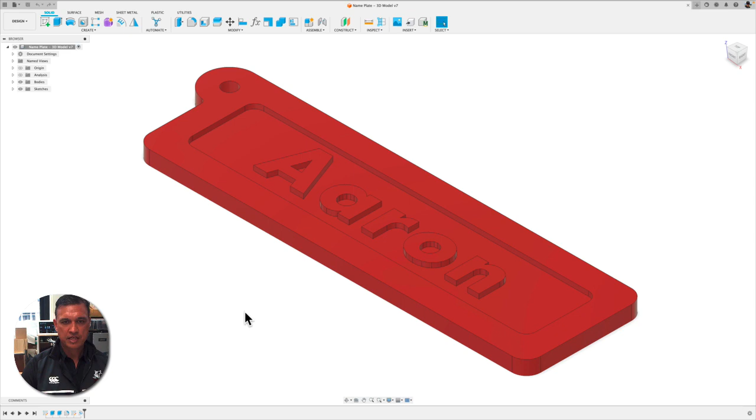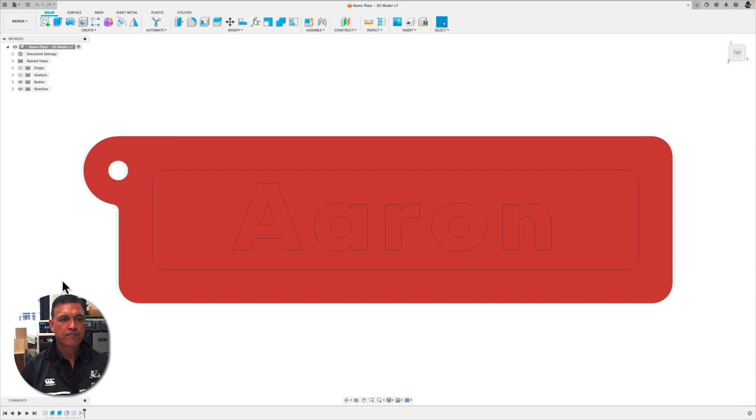Here is the model, the end result of what we're going to make in this tutorial. You can see we have some text in the center. Going to the top view, we have a small hole here for a ring so that this could be attached to an item, and it's essentially made up of a rectangle, a few rectangles, and a couple of circles. So let's look at how to create this.

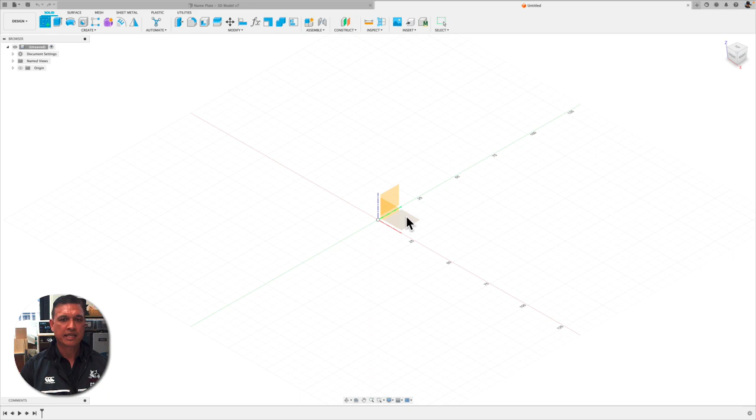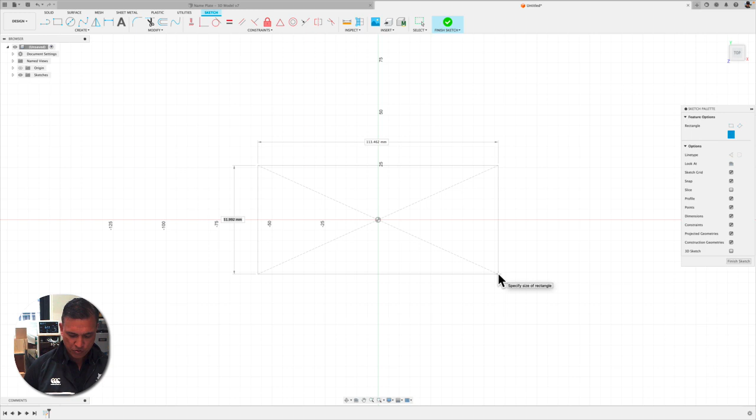Going to start in a new document with a new sketch, and I'm going to choose the XY plane here. Fusion will rotate there, and we're going to begin with a rectangle. We're going to choose a center rectangle - it doesn't actually matter what kind of rectangle you use, but a center one is quite useful for this project. The height is going to be 25 and the width is going to be 82. Okay, that's the overall size.

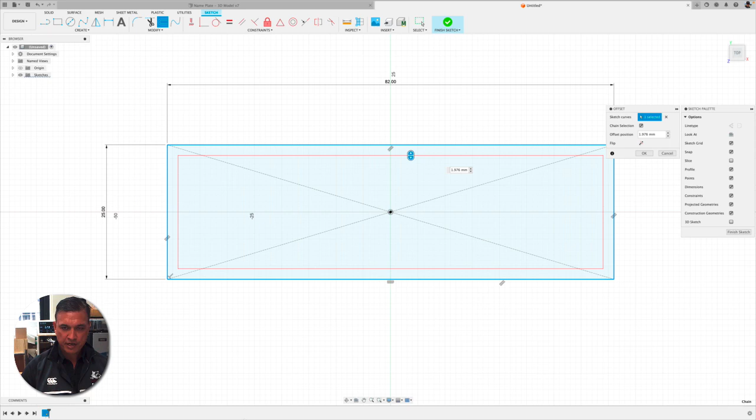I'm going to zoom in here on the nameplate. I'm going to use the offset tool with the letter O. I'm going to take an offset of the outer rectangle and bring it in by 5 millimeters. This is the area where the letters of your name will appear.

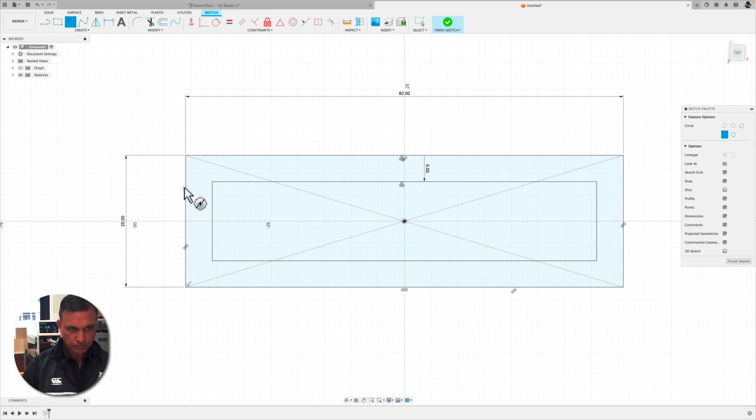Now I'm going to take a circle, using C for circle. Along this line, you'll see it snaps like that as an X. I will bring out a circle and set that to 10 millimeters. Then I'll also create another circle in the center, and this circle will be 3 millimeters.

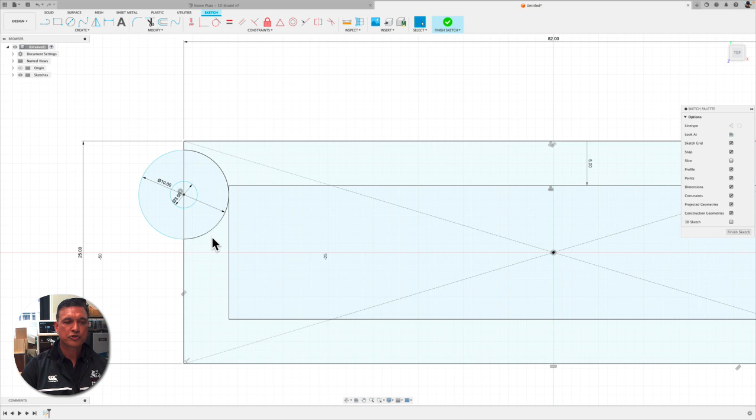Now I'm going to ensure that this circle is tangent to this line, so I'm going to use a tangent constraint. I'll select the perimeter of the large circle and just choose that line to create the tangency.

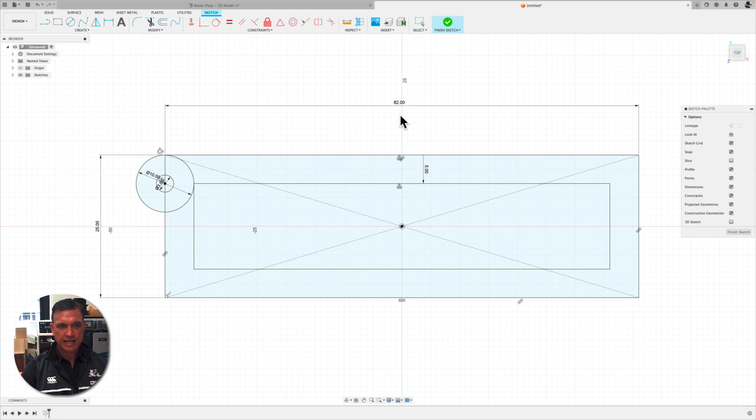Now I'm going to press escape so that I have left the constraint tool, and just review the measurements here. So I have 82 long, 25 wide, a 10 millimeter diameter outer circle and a 3 millimeter diameter inner circle, and that circle, you can see with this glyph, is tangent to that line.

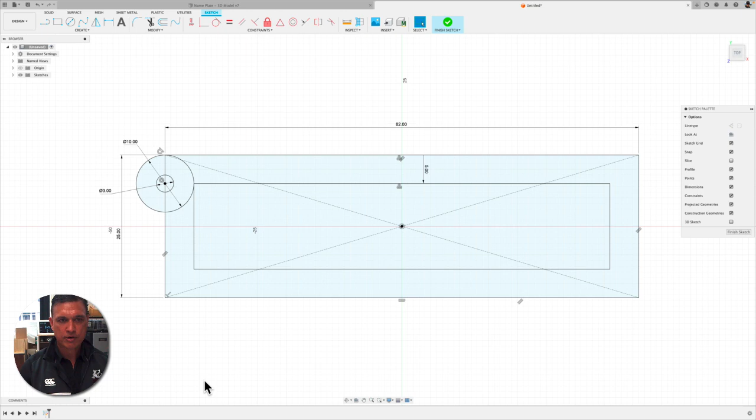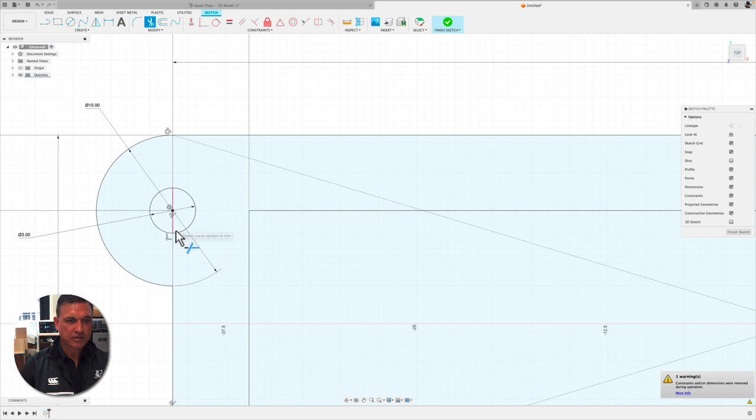I'm now going to use the trim tool to trim away this part of the circle and these lines that I don't need. So I'll press T for trim - you can think of the trim tool as like giving your sketch a haircut. So I'm going to cut away or trim away these lines that I don't need, and you can see I have that nice circular part coming out from the side.

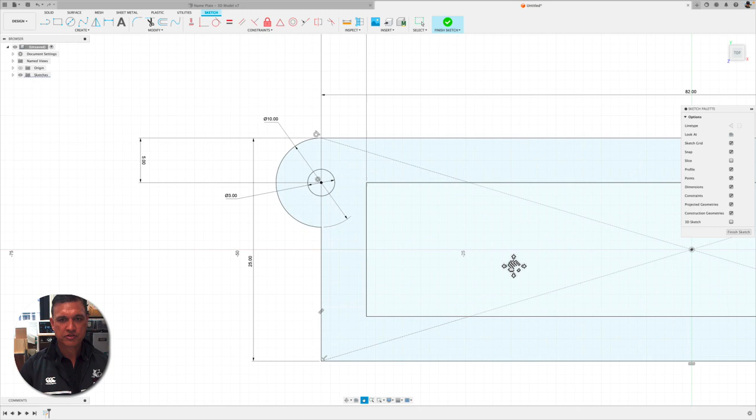Be sure to press escape to leave the trim tool, and now I'm just going to add a fillet all the way around the outside and to the insides of the sketch. We can apply fillets right here in the sketch with this fillet sketch tool. I'm not seeing it here, but you should be able to find it under the modify menu - you can see here, fillet.

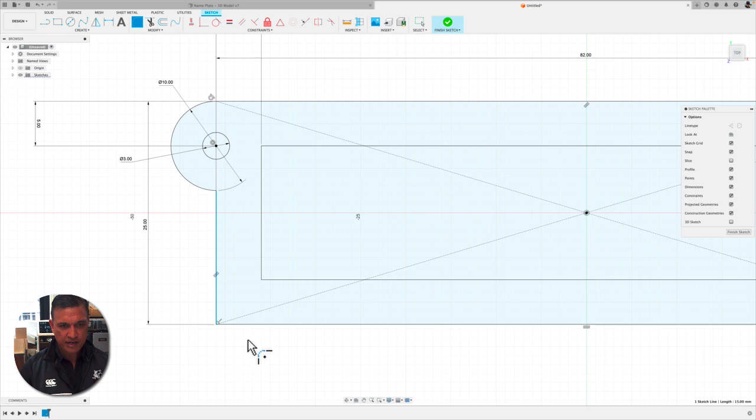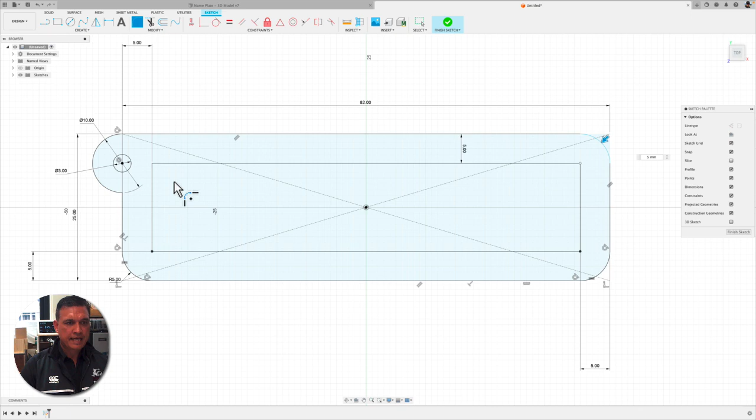So I'm going to take this line and this line, and you'll see it's waiting for me to give a fillet radius. We're going to be using 5 in this design. I'll pan across and then add 5 to this edge and 5 to the edge of these two lines, so we have 5 all round. And then I'm also going to come in close here and touch this circle and this one - that'll be 5.

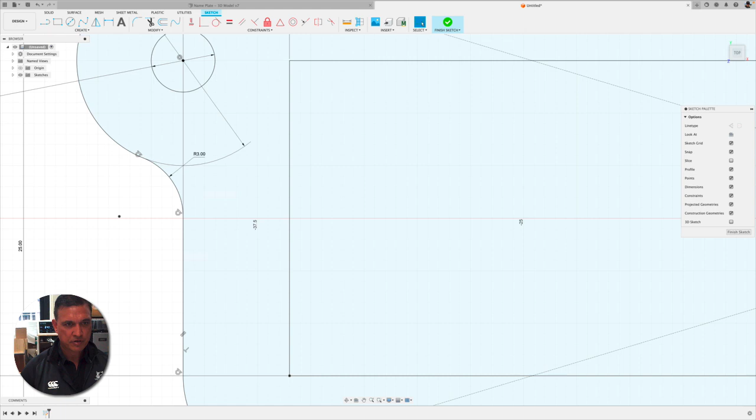Now I'm going to press escape. Doesn't appear to have added the fillet here - it might be too much, so I'll try that again. This one and this one, and we'll try 3. Press enter - here we are. 3 works nicely there. We'll just bring out the measurement so it's a bit easier to see.

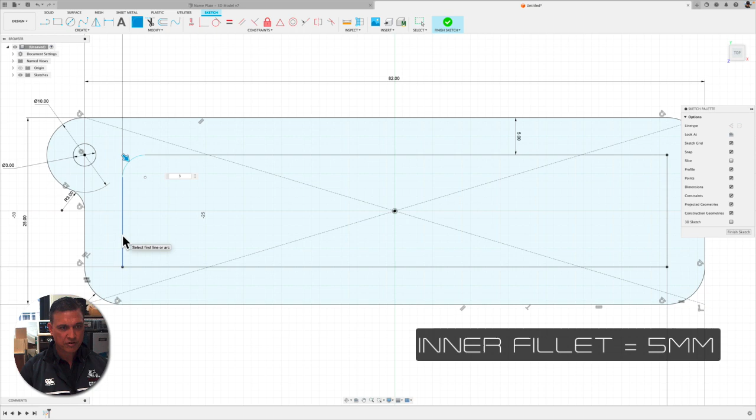And then we're going to add on the inside rectangle those fillets as well. So I'll choose the tool and we'll use 5 for the inside. Just move around and do that so we have those nicely filleted.

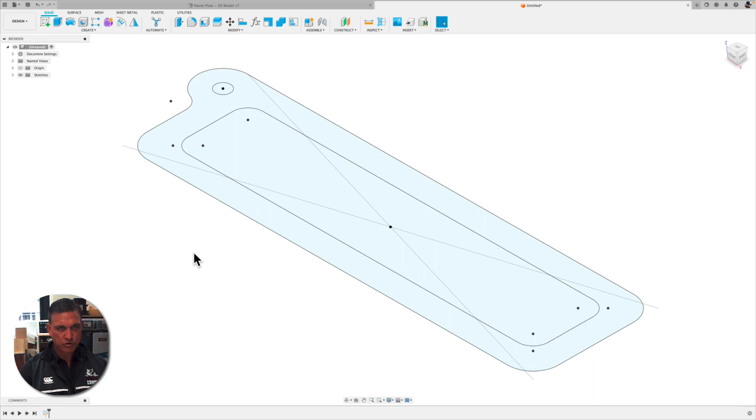Okay, we can now finish the sketch and we'll move to the home view. It's good to move to the home view because at this point we want to extrude the sketch into a model, so we'll press E for the extrude tool. I will select these 2 sketch profiles but not the inner circle - that will be a hole - and then we're going to come up by 3. This will be 3 millimeters in thickness.

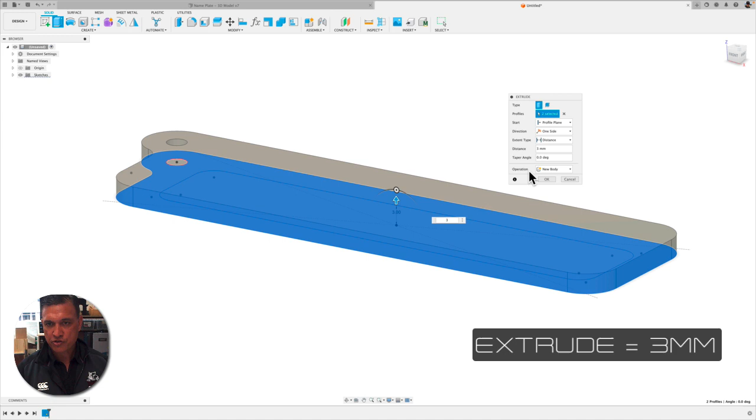Ensure the operation is new body, then click OK. Now we have a new body.

We're going to repeat the extrude command by pressing E, but this time we'll try to select the sketch underneath this body. There's a trick to do that: click and hold the left mouse button, and a little menu appears. From that menu you can choose the sketch profile you need, and you'll see it highlighted.

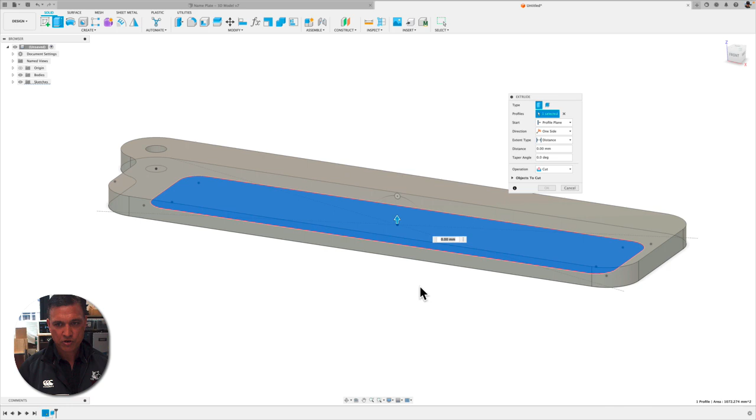If I move the model orbit to the side, I don't want to create a new body—that's not the operation I need. I actually want to cut this body, but not from the bottom, even though my home orientation is facing this way.

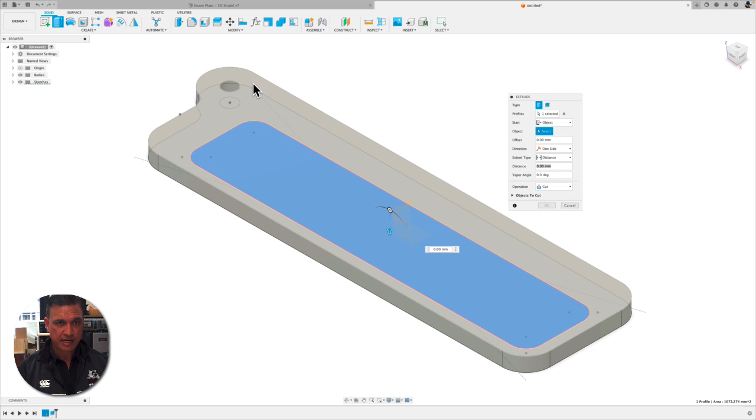I want to cut from the top down. So I'm going to start the cut not from where the sketch profile is, but from an object—I'll select the top surface of the body.

Make sure the operation says cut. I'm selecting the top surface, and now I can drag the arrow down. You can see red indicates it's a cut, and the operation tells us it's a cut—we want to cut down, or negatively extrude, by -1.

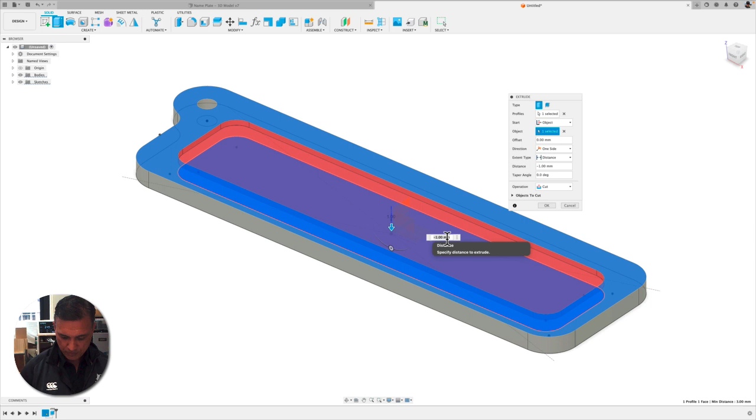Press enter. If I turn off this sketch, number 1, you'll get a sense of the object. Okay, the final step is to add text here on this surface.

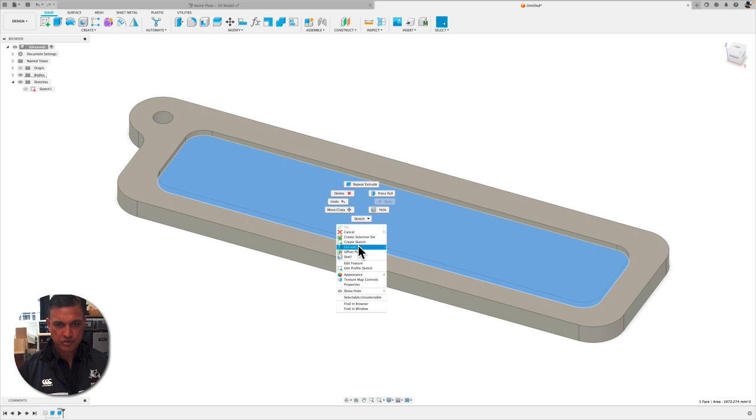To do that, I'll select it once, right click, and choose create sketch. This ensures the sketch is going to appear on this surface. We're going to be using the text tool to add some text.

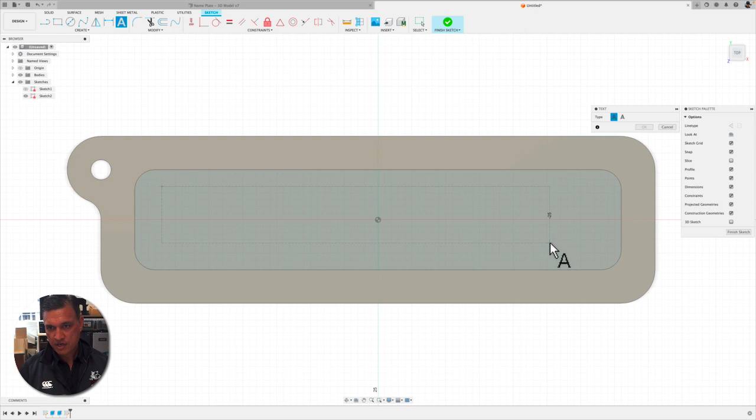The trick to the text tool is to define the area you want the text to appear. I like to start at the top left corner, move across with your mouse or trackpad, and then click at the opposite diagonal. In the text box, put in your name.

Because I've done this previously, it is using the font that everyone needs to use. This font will print reliably, so by default it shows Arial, but we want to use Futura—every system should have this installed on your MacBook.

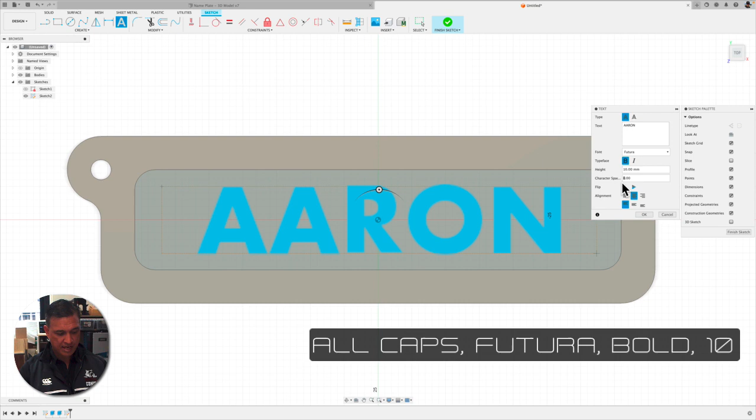If you have a very long name with many letters, you might want to experiment with different character spacing and slightly different height. The alignment will be center, and then we'll click OK.

We'll now finish the sketch, and make sure you're in the home view. We're now going to emboss this text, raising it up from that sketch surface. So we'll go over here to emboss, in the menu.

In the emboss menu, we're asked to choose a sketch profile—that's the text. Then we're asked to choose a face, so you click to select. The face we're going to emboss from is where the sketch is, this face.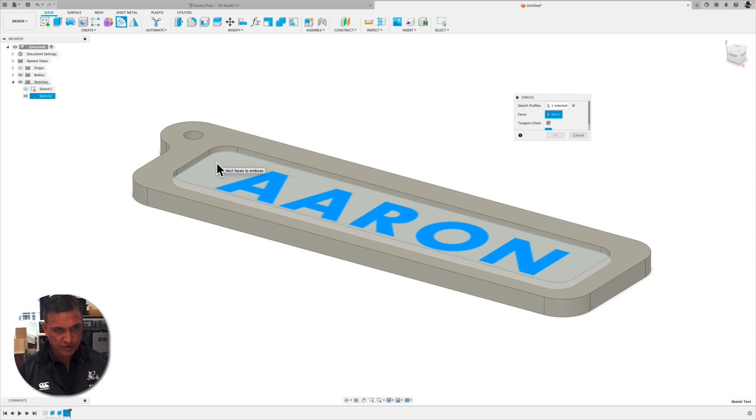You may need to scroll down to see you can emboss or deboss. We're going to emboss, and the depth will be 1 millimeter. Click OK. We should now see the text is at the same height as the top surface here.

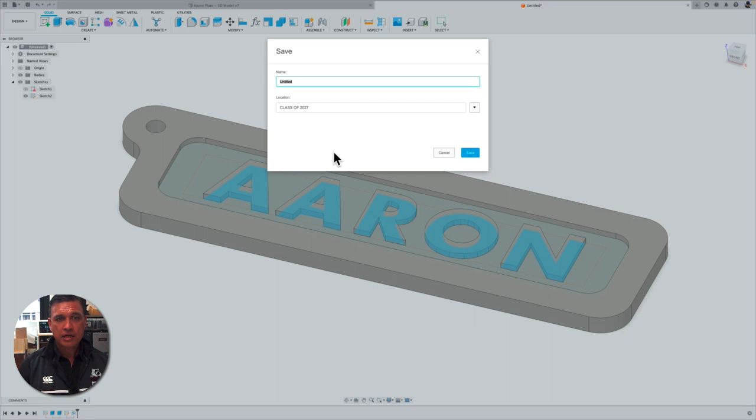Your model is now in the correct location, so I'm going to save. In your case, make sure you're in the class of 2027, in the correct class folder. I'm going to add this to the resources folder since it's a demonstration or sample, so I'll name it sample nameplate.

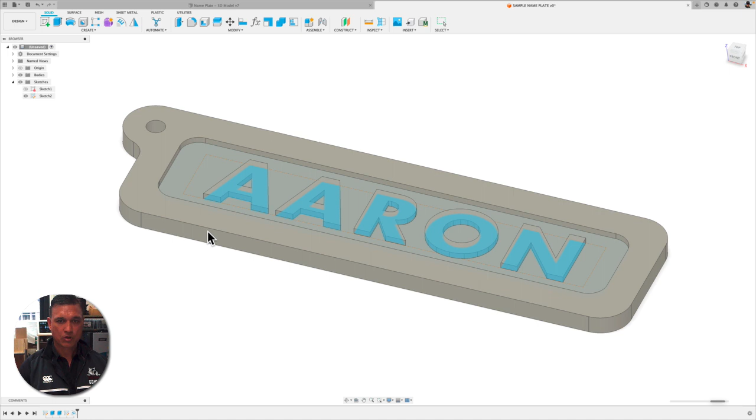There we are, and I can turn that sketch off so it looks a little better. I'm also going to use the appearance menu with the letter A, and in the library search for plastics—although it will eventually be printed with plastic—just to give it a bit of colour.

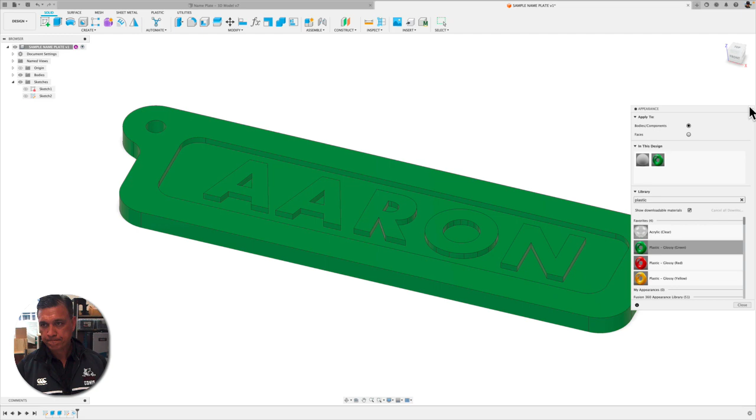Then I'm going to export this file for the 3D printer. If we look at the export menu, you need to give it a name—remember, use the section, then your name, then the name of the project, nameplate, and then the color you desire from the printer.

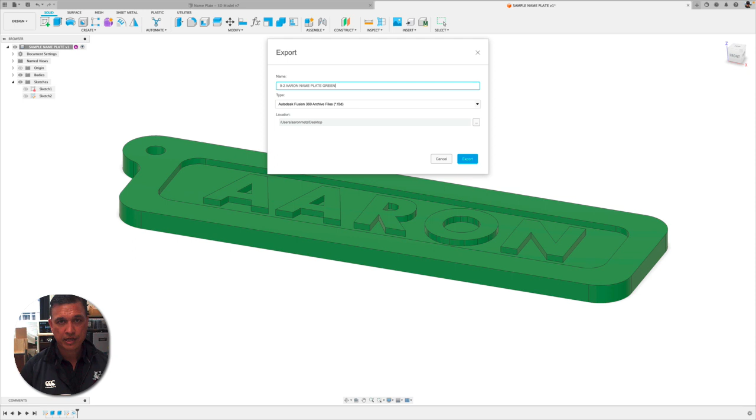In my case it would be green. The type of file we want to export is STL, this one, and pay attention to the location. Once you've exported the file, you're going to upload it as part of the assignment. And that's it.